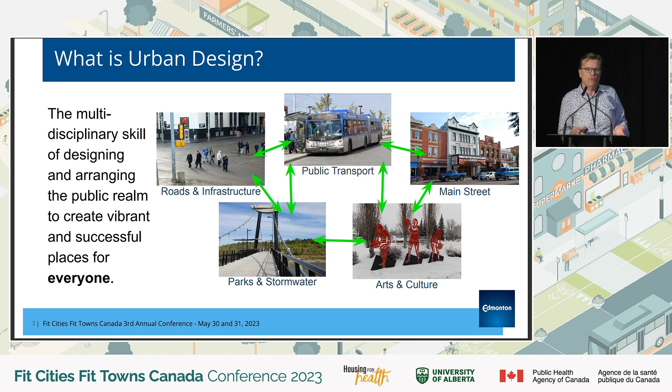One of the things we're focused on right now is creating an urban design manual. They come from the urban design principles, which are our guiding principles, and I'll quickly go through those. They were developed a few years ago and link with the City Plan document that the City of Edmonton completed. It's an excellent document with a lot of great information, so feel free to have a look. That's our guiding document moving forward. The urban design team has come up with a set of guiding principles from an urban design perspective to link to those as well.

The first one is authentic, making sure that we build our cities so they're truly authentic. We talked earlier about making sure we relate to Indigenous peoples who came before us, and making sure we don't forget all the different cultures that make up our great cities, towns, villages and reserves. To me it's all just places, and we've got to focus on those places and make sure they're authentic.

Inclusive is the second principle, making sure cities are accessible to everybody, not just the able-bodied. A lot of my focus is reviewing projects and applications to make sure universal design is considered throughout. Walkable - we've heard a lot about walkability, and I will never stop talking about that because I've walked most of my life. I grew up in downtown Toronto and walked everywhere, so walkability is important.

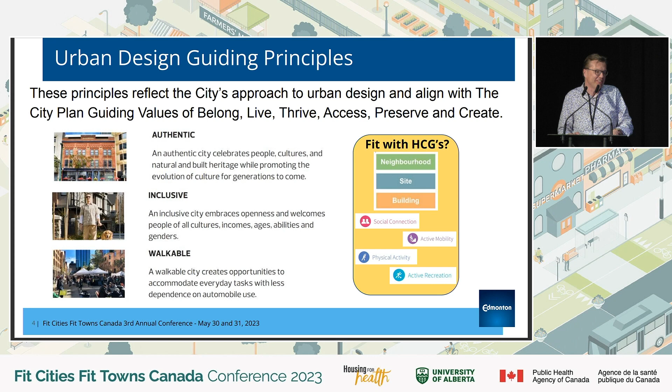Connected is our fourth principle, making sure everything is connected through various different modes and systems. Healthy, obviously, that's why we're here - we're here to talk about creating a healthy city, so healthy is one of our key guiding principles. And of course vibrant, making sure cities are fun places to be.

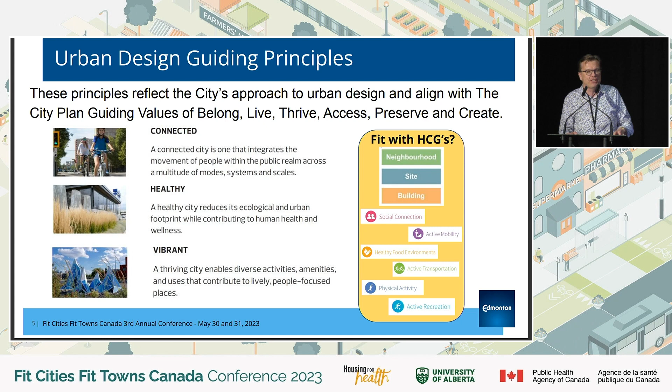I love the presentation the City of Calgary showed about color. That's one thing when I first came to Edmonton - I've been with the city about 7 years now - a lot of the architecture and neighborhoods are pretty boring. I hate to say it, but a lot of tans, grays and whites. We need more color in our places, and that's definitely something we're really focusing on at the City of Edmonton. You're going to see that in some of our new stations along the new LRT lines under construction and bus stations, and Daniel will talk about that later.

So the Urban Design Manual - what is it? Basically, you won't be able to get a copy of it yet, I'm sorry to say. It's not finished, but I don't think it'll ever be finished - the whole point of the document is to be a live document. It'll be online, with a number of different sections. We have about 8 finished now, and hopefully they'll be online very soon, and I'll let everybody know once they are.

The whole purpose of this document is to talk about everything that makes up a city. It's just what you see in the image: the structure of our city, our neighborhoods, our built form, the public realm, signs, and other detailed design elements that are on buildings and on our streets. All of that's going to be covered in this document.

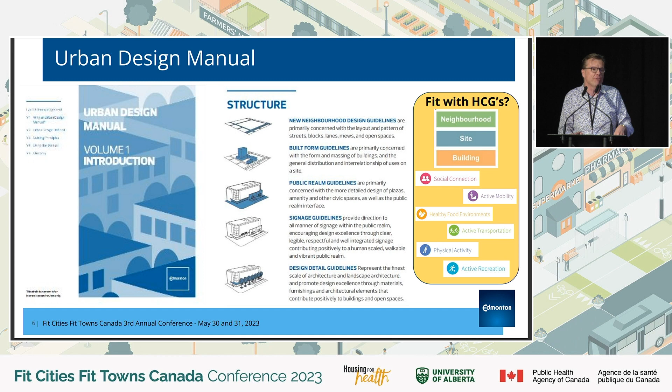As I said, it's going to be a live document. It's going to have sections that are probably 4 or 5 pages long, so they're not arduous. You can have a quick look through them. Very simple. Now, they're not standards, they're a guideline. But the point is, we're trying to educate a lot of the developers that we have, just like the City of Calgary is doing the same thing, educating developers to ensure that we're designing buildings that fit with all these principles.

This is just a quick snapshot of one of the ones we've recently finished. It's on our civic spaces. I'm not going to bore you with all the detail, but you can see how it links with some of the points made in the Healthy City Guidelines.

We're talking about civic spaces and how we design them. Obviously, lots of trees, lots of landscaping, making sure that there's connectivity in there, making sure you can get from place to place, whether this is in downtown or in a number of our new nodes that we're creating.

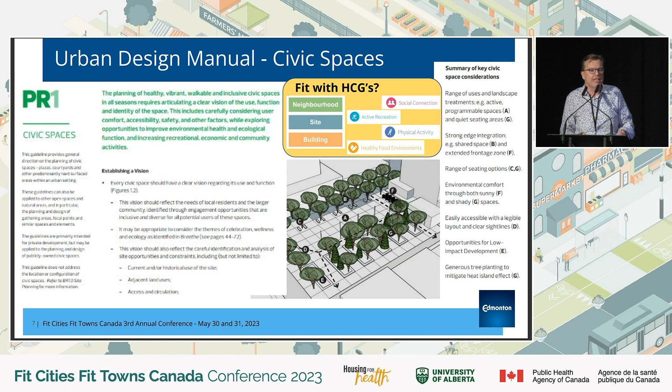And that's the whole purpose of City Plan, to not just focus on the downtown core, which we have been doing for a very long time. We have to start focusing on our suburban nodes as well, and making sure we design those so that people can get as many things done there. They don't always have to come downtown to live their lives.

Another aspect of it, again part of that educational opportunity working with developers and other builders throughout the city, is our urban design brief. That document talks about the project - and you can look, this is online already - it focuses on a particular project happening somewhere in the city, making sure that the architects and designers are going through a full project overview, providing a neighborhood analysis. So it's not just looking at their site, it's looking at what's around the site, making sure they're linking to other things, and obviously what the design intent is.

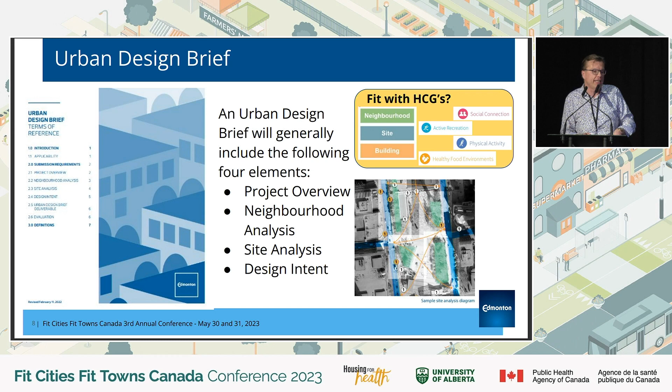So all of those things will be part of the application process when they go to submit to planning coordination to get their applications approved. And I'll just flip over now to universal design.

For those who don't know, the city created the Access Design Guide, which you can see there. We're on version 3 now, and we're going to be working on 4 soon. The whole point of this document is to make sure that all our city-owned buildings, facilities, parks, and spaces are universally accessible.

Hopefully someday, fingers crossed, we can apply these to everything else in the city, the private realm. But we're focused on the public realm right now, making sure we're doing a good job as a city so that we can definitely show developers how we're designing something to make sure that it's accessible, to encourage them to do the same.

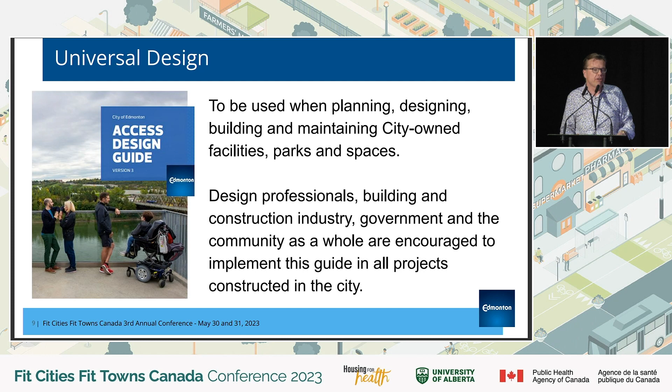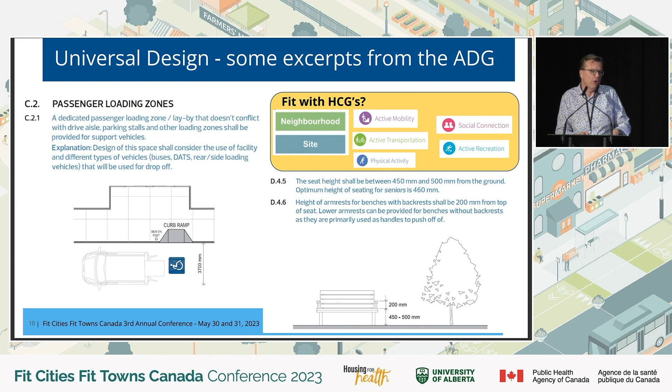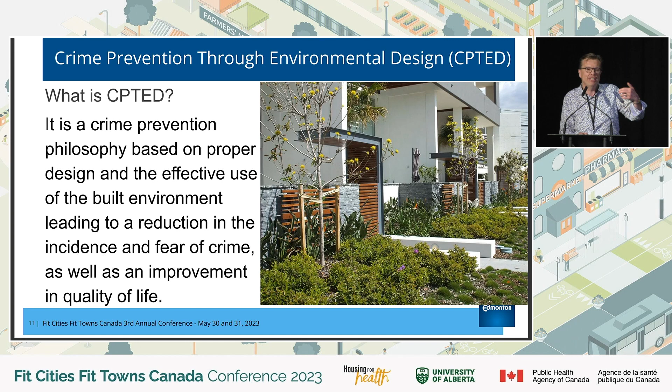CPTED is another thing. For people who don't know what CPTED is, it's basically a philosophy trying to ensure that you're creating a built environment that is not only accessible, but also feels safe. It doesn't help to fully eradicate crime, but it can help to make it a safer space. It's that whole 'eyes on the street' perspective, making sure that when we design buildings, they actually front onto a street, and there are windows that front onto the street.

And for those who don't know - and when I say that, I also mean a number of City of Edmonton employees as well - we've had the design guide for a safer city since 1995. I'm not sure, but not many people at the city know about it. And it's a very good document.

It's got some really good things in it. So what we're doing now, and I'm helping to lead this work, is we're renewing this document, which is very old. We're going to update it. And I'm stealing stuff from previous life in New Zealand. Those are the principles that we'll probably end up using, not guaranteed, but those are the principles that we'll probably be using in our new document that the city's going to have for our new CPTED document.

So it's not just focused on eradicating crime, putting up lots of fencing and cameras and strong lighting. It's actually about building decent communities, right? It's to get people active on the street and the eyes on the street. And that just makes a place and a space safer.

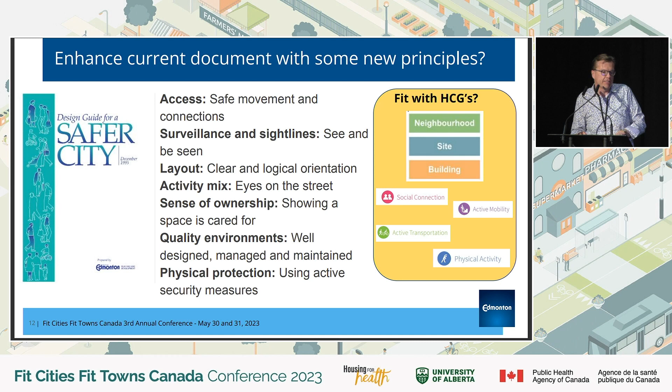And so hopefully the next time I get to present that new document. It's probably going to take us a while, but I'm looking forward to presenting about the CPTED design guide in the near future. So if anybody have any questions, we'll talk about it later for sure.

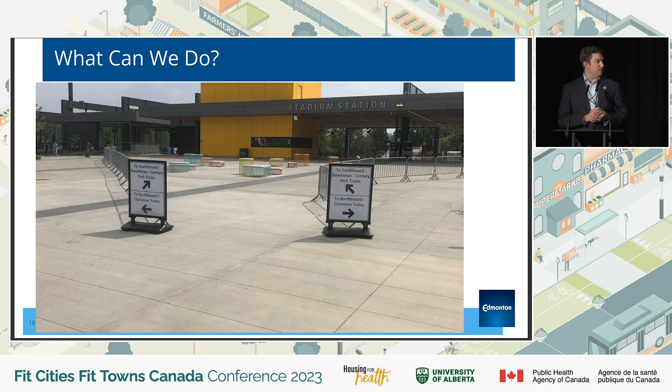This is something that working through CPTED design guidelines and urban design guidelines, and applying that knowledge—people in your city, if you're not from Edmonton, if people like Robert have to apply those principles to our design—is crucial to improve the outcome, the broader social outcomes and access to transit. So when we renew spaces, we can use things like urban design guidelines and have a really positive impact on the accessibility of our transit network.

What else can we do? We have a safe mobility strategy, and people are still going to drive. That's going to be a major component of our transportation network, but we can make our transportation system safer.

And we need to do that in a number of ways. We need to make sure that we have a community of safe communities, so people feel safe in the places where they are, whether that's their neighborhood, their street, or their school. And that isn't just about engineering factors, in case you're one of those people that thinks that way.

I have an engineering background and tend to think about measures, but part of that is about the process of having that conversation and bringing community together, about the safer streets implementation work that they've done in Calgary, bringing the community together to have those ideas. We've done some of that in Edmonton as well, understanding what the community needs, and then bringing people together along the way to do that.

We also learned through this process that we need to be safer for everyone, and part of the work we did was an equity analysis to understand who is safest and who is being impacted the most by our transportation network.

Perhaps unsurprisingly, but also hate to say it, the people impacted the most were lower socioeconomic status neighborhoods. That's where we saw the highest amount of collisions, almost inversely proportional to the people providing feedback to the city through regular means—higher socioeconomic status neighborhoods provided the most feedback and insight into their communities.

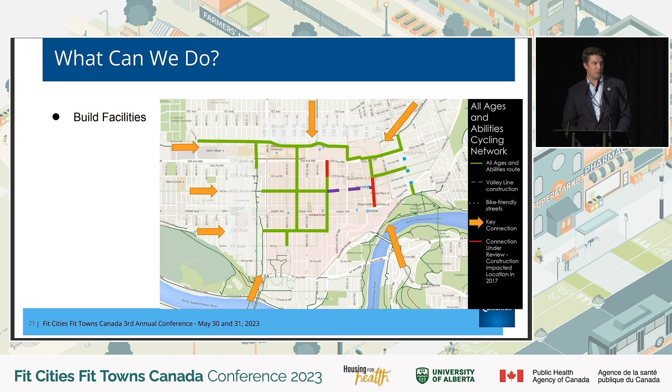So all quickly implemented, rapid design. Why did that happen? Again, that was a dedicated group of community members who advocated to council to do this. Our goals with that program were to increase the number of people cycling, to provide opportunities for daily physical exercise, to increase the proportion of female cyclists, decrease the number of cyclist-related injuries, and increase positive user experiences.

We evaluated that about a year in. We saw some improvement in the gender split—some equity increases. Overwhelmingly, for both cyclists and drivers, we found positive reaction to the design: cyclists were more likely to be cycling in the bike lanes, and drivers more familiar with how cyclists would behave. That doesn't mean everybody supported the project, but for the people using it who were asked on site, they felt safer and clearer.

I also want to point out our user statistics. After the bike lanes opened—we didn't install counters before, this was quite rapidly done—we had about 300 daily AM peak trips. A year in, that rose to about 800, and this was pulled yesterday: we're now in the 3,000s.

Quite an increase. I'll say we've continued to invest in cycling to the point where I just came from a meeting on how we're going to spend $100 million on cycling over the next 4 years, whatever our priorities. So the investment continues.